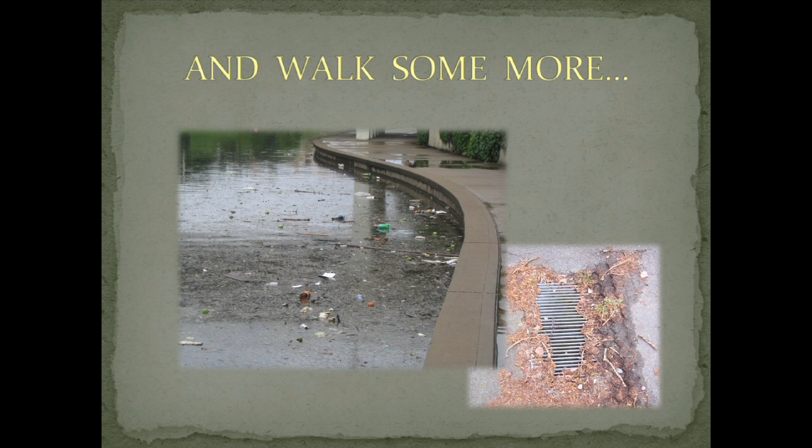So that's a very, very sad story. And then this is another thing that happens: as we're walking around, you see people throwing cigarette butts in the trash and whatnot. Stormwater comes in with the rain, washes it all in there, and then it sits there.

This is another big problem. Why? What do you see here?

It's all sediment. If it hits all at once and not over the course of years and years as wind blows and it falls off trees and shrubs and lands in water, breaks down, critters eat it—versus it all hitting at once off the city sidewalk because the rain just came and washes it—then everything that was in the creek bed and maybe even gravelly space is all suffocated, compressed and compacted.

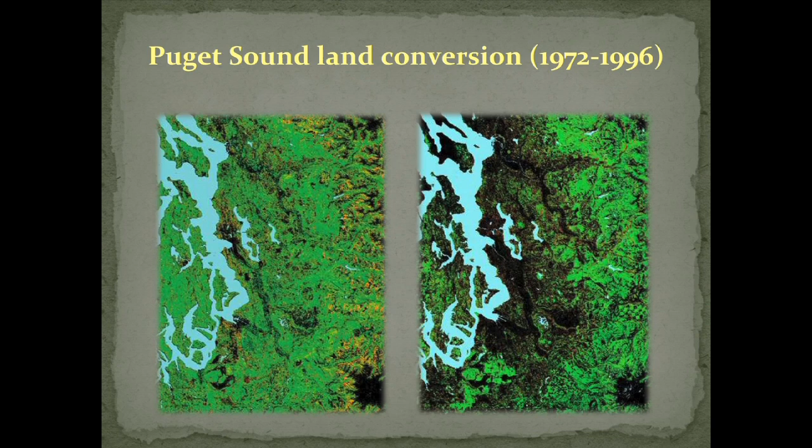This is a sad image, and to me it's sad not because of the black in the 1996 map, which is all development, but the fact that this is almost 20 years old—an 18-year-old picture, guys. What we know, because I've lived here now for 25 years, is that since '96 we didn't add canopy back. This only got worse, a lot worse.

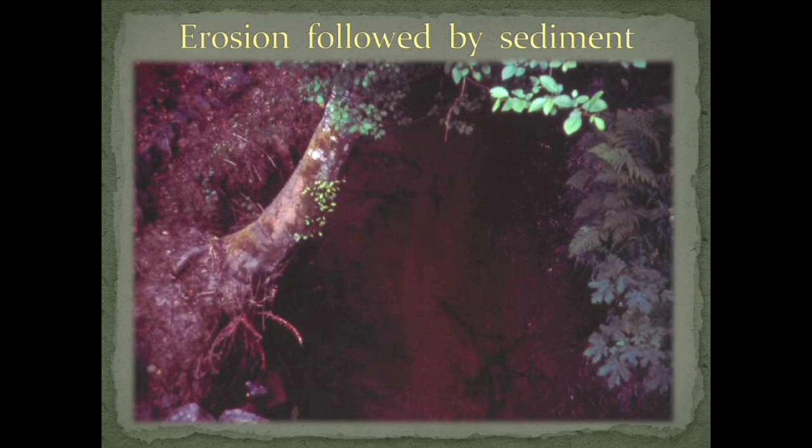We have flash floods practically in those streams, even though we're not having flash floods on the street, so we're not concerned with it. But water critters are very seriously concerned, because they are experiencing a flash flood, and it erodes the banks, undermines vegetation, and this is usually what it looks like. You've seen this a lot, I'm sure, if you pay attention to streams and creeks nearby your place. This is not the good color of a stream, this is not a good flow—you're not up in the mountains with waterfalls and rushing snowmelt. This is city.

So we now have regulations addressing all these problems, driven by a couple of things. As we talk in code, I'll go into more detail, but one big engine for us in protecting our waters is the salmon, because salmon is money. We pay attention when it's hitting us in the pocketbook. Salmon is industry—it's a huge market for people who are fishing, including the tribes, commercial fishermen, and private individuals out having a fun time. The permits, the fishing gear that gets sold, it's pretty important. So now that we don't have enough salmon to keep all those funds rolling, we're paying attention, and salmon became an endangered species.

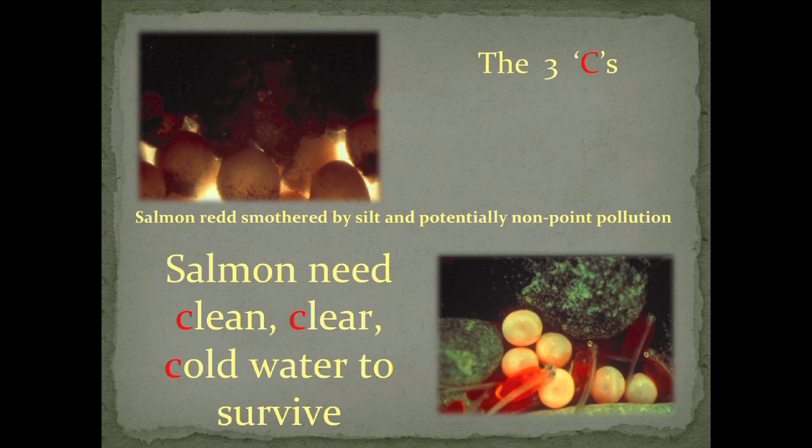A lot of them are on the verge. So now we have regulations enforced by the federal government, demanding that we get back to our 3 C's—clean, cold, and clear water—because that's what fish, especially salmon, need to stay alive and thrive. You see the eggs here covered with sediment—they will never hatch. This is what they need to look like.

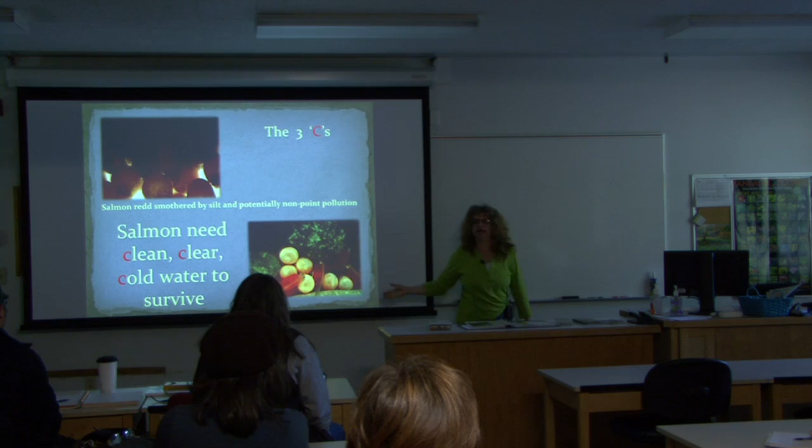How many of you would like to have this in your basement? Not many. So it's a totally legal event to overflow it into the nearest natural waterway. It has to go somewhere. We are on an overload.

Because of the salmon challenge, we now have limited volumes that each sewer system has a permit for—how many gallons a year they can overflow, and how many times that can happen. If they exceed that, there's a financial penalty they have to pay, which comes out of your sewer bill. This penalty drives improvement, to find other solutions for managing runoff. If they invest that money into a solid management system instead of paying penalties, they can reduce the volume and number of overflow events.

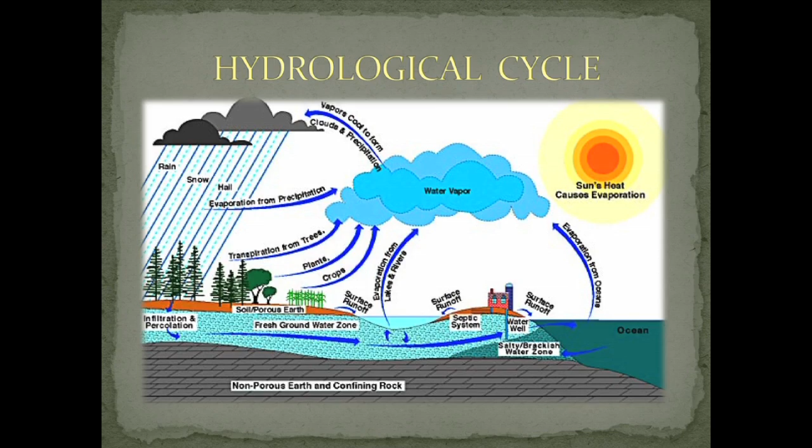I want to talk about this in more detail. We've already gone through the fact that we have a natural water cycle, but it has a lot of other implications. The water cycle is very intimately connected to chemistry cycles, including the nitrogen cycle. It's also very important in terms of atmosphere and climate. So it's not just that we're reducing negative impact or positively impacting salmon—we're able to alter our own climate with how we manage our cities. This is why stormwater management is becoming so important.

If you have uninterrupted native vegetation—in our case, coniferous forests, deep forests with lots of layers, but in the Midwest it used to be prairies, lots of beautiful wild areas that didn't have a lot of trees necessarily—it still functioned fully the same way. You have canopies that could be several hundred feet before we cut those trees, and now we're wondering, 'oh, it's an 80-foot tall tree'—it's a baby tree. We used to have those big tall canopies.

Have you ever stood under a big Douglas fir in a rainstorm? How wet do you get? Barely anything, because the canopy captures most of that water.

And then the water, as it's dripping down and rolling down on that tree, it comes in little bits, meaning that whatever is below it is not going to get soaked. It doesn't experience that same rain that the higher canopy had seen. Then we have our tall understory canopy, the medium understory canopies like vine maples and such, and our shrub layers, and then our taller perennial layers, such as ferns and other things. And then we have the ground covers and ultimately the duff layer on the ground.

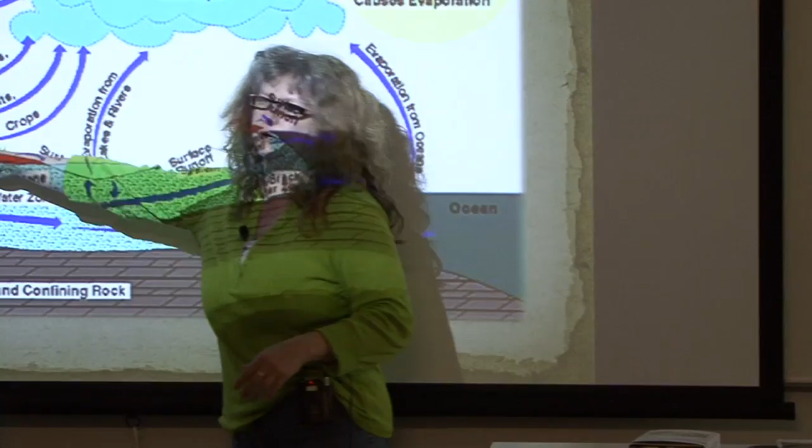Now, with these changes that we created, we don't have the steady evapotranspiration happening. And we are experiencing here in the Northwest too unusually sunny and dry periods that we didn't have before, because we don't have a cloud cover anymore that we used to have.

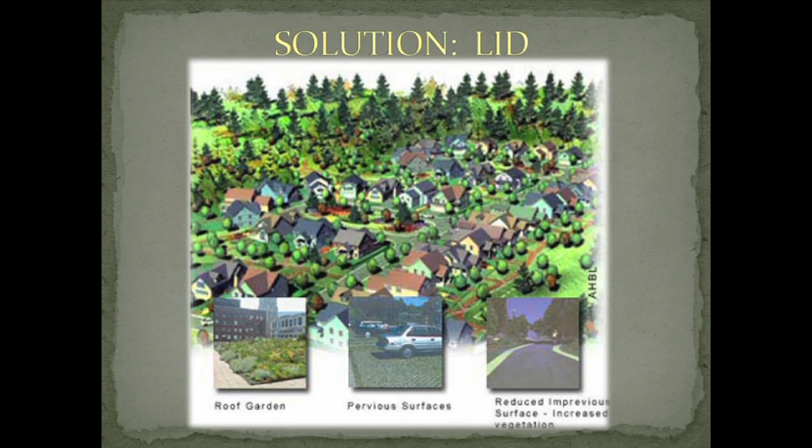This is very disturbing. So this is how LID, low impact development, came about. And the idea behind it was to reduce the damage. Because still, when you're talking to people, you will hear, it's not fair to ask that we change our life back in one day to sustainable. We can't just expect people to throw away their chemicals and throw away their bad practices and do something different tomorrow. Well, we may not be able to ask that, but our planet is actually asking for it.

If we are not doing it, we're going to be tossed overnight into very interesting places. So low impact development was the gradual pattern. Now we finally arrived to the positive impact, and it has to happen very soon. And there is money actually behind it from forward-thinking governments. So low impact development looks at this, what we created, and tries to make it function in terms of water.

Like this. Because you cannot build the forest back. Let's be honest, this takes thousands of years. It didn't just happen overnight, and it does need time, and we destroyed it overnight. Because we can't ask people to change overnight, but we sure can do that to nature.

So hydrologically, we're asking our built environment to function like a forest in the Northwest, or like the prairie in the Midwest, or wherever you are, you're trying to mimic your natural environment. That's what low impact development does.

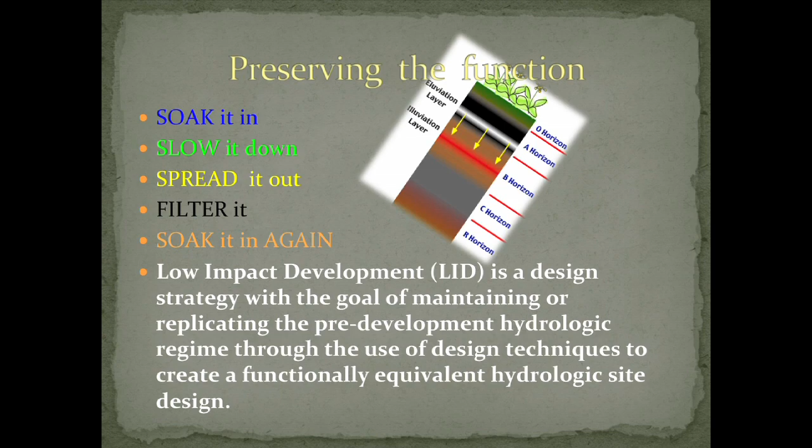It wants to slow that water down. So instead of hitting within minutes after the rain is starting and causing a flash flood in the stream bed, slow it down and make it so that January rain doesn't show up in our streams until June, because it's moving through soil instead of a pipe. Spread it out over a vast area, because the canopy of a Douglas fir, when you add all the surfaces of the branches and the little needles and everything else, it's tremendous. It covers a large area, so spread it out as much as we can.

And filter that water, because this is what our forests and our soils did. First of all, we didn't have all this industrial stuff coming down in the rain, but then they were able to take anything that did come from volcanic activity or whatnot and filter that. So they can actually help filtering the water. Soil does an incredible work at filtering water.

And then you want to soak this water, whatever is still remaining, into the ground again. Put minimal into pipe, if any, at all.

And then I want to talk about this here, because today we will be talking mostly about green roofs and vertical plantings and low impact development related to that, and food growing related to that. Sustainability is a very big subject.

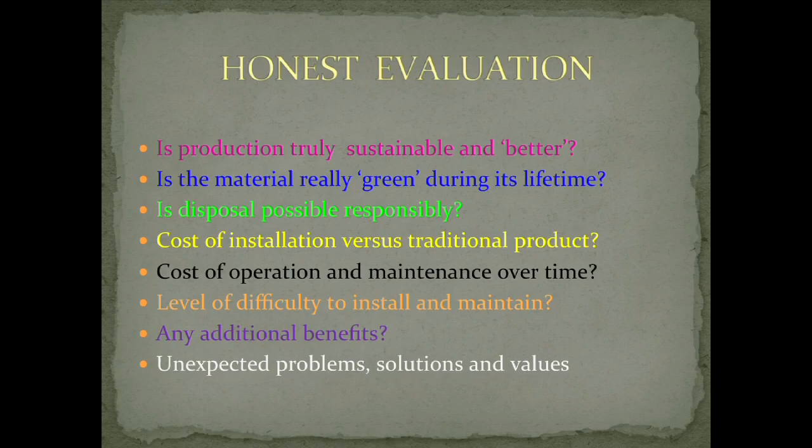And when you're looking at how sustainable something really is, you got to evaluate what you are looking at. This is a set of questions that was developed 8 or 10 years ago by the Sustainable Development Task Force of Snohomish County, which we had running for some years. One of our projects was to actually create a standard on how we can look at new solutions that were brought to us, how we can decide whether or not they really qualified as a sustainable solution. And when we talk about green roofs and green walls, these questions will become very important.

So, production of whatever you're using, is that really a better system? And when you're looking at it, you have to look at all the different aspects of carbon footprint, transportation, water, air quality.

Jobs, wages, conditions for those people. If they work 24/7 like I do, is that out of choice like for me? Or is it because they have no other way to pay for the food? Is it slavery? What is it?

And then, is that material really green in its lifetime? And how do we define green, by the way? That's why the blue economy came about. How do we define green? We were so focused on just materials, people got sort of forgotten about.

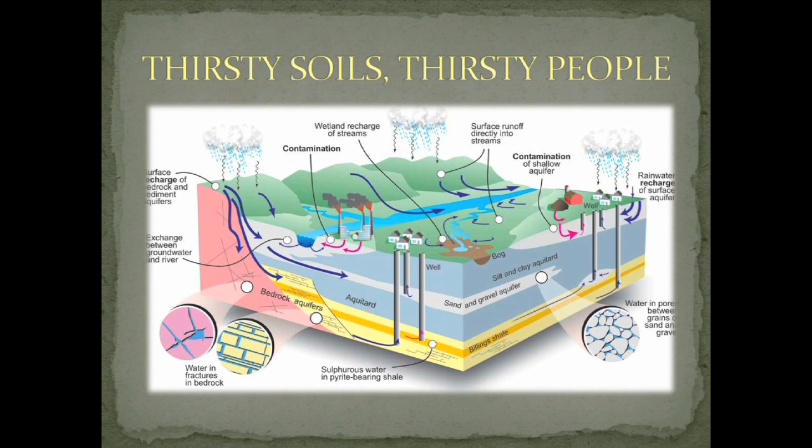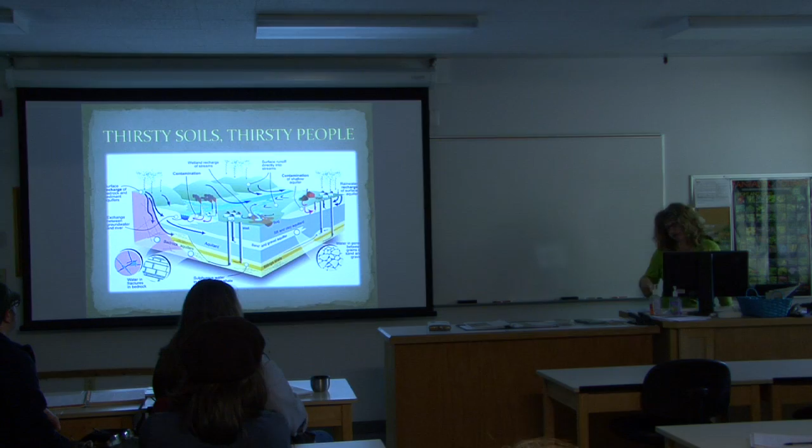Here's another image that, as you look through the slideshow, I want you to really think about, because it shows the soil layers a little better. Aquifers and what happens, and how water actually can sit between the gravel and sand particles. These are much better aquifers than clay. So the aquifer for us is either sometimes below hard clay pan, or right on top of it where we have gravelly pockets and sandy pockets.

Underneath Everett, actually about 60 to 65 feet deep, you have beach sand from previous geological times. It's beautiful sand. So once again, this is what we're mimicking.

And then cost-wise, we now have proof, with Seattle leading the charge in the nation, that over a 50-year maintenance and installation period, these systems—green and low-impact development technologies—are more cost-effective than traditional development. It's important to keep in mind that overall the cost is less.

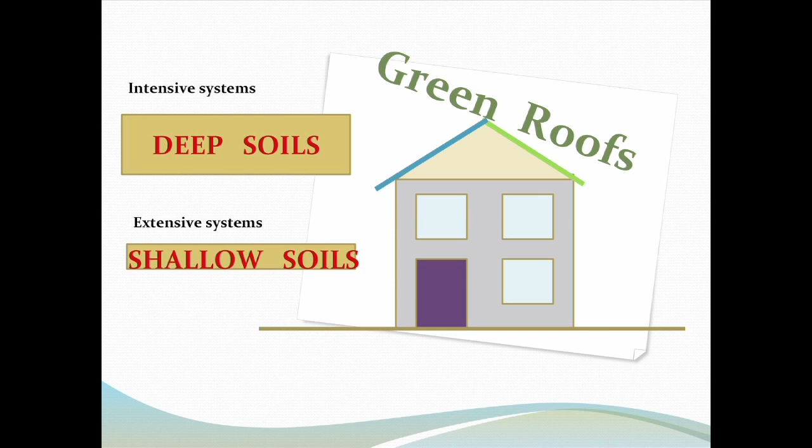So, green roofs. It's one of those things we hear about a lot. I love green roofs when they are done responsibly. And I really believe that a lot of the green roof systems we have are done incredibly irresponsibly, and we'd be better off if we just kept our roof. But I'll talk about that in more detail as we go on.

It's a low-impact development technology. In some parts of our country and the world now, it's a required technology—if you're building a new building or remodeling, you have to use green roofs if you're within a certain city limit. It has very good goals and reasons behind it. Green roofs and green walls are the fields that got the biggest greenwash. Greenwash means when something is sold as green and sustainable, yet in reality does very little toward that.

We have two kinds of green roof systems: intensive and extensive. Intensive has deep soils—usually if you reach 8 to 10 inches, you're in a gray area some call intensive and others call extensive. Beyond 10 inches, once you're in a foot or deeper of soil, you're in an intensive roof. If you're below 8 inches, it's an extensive roof. Sometimes roofs can have only 2 inches of soil on them, believe it or not—that's the very end of the extensive spectrum.

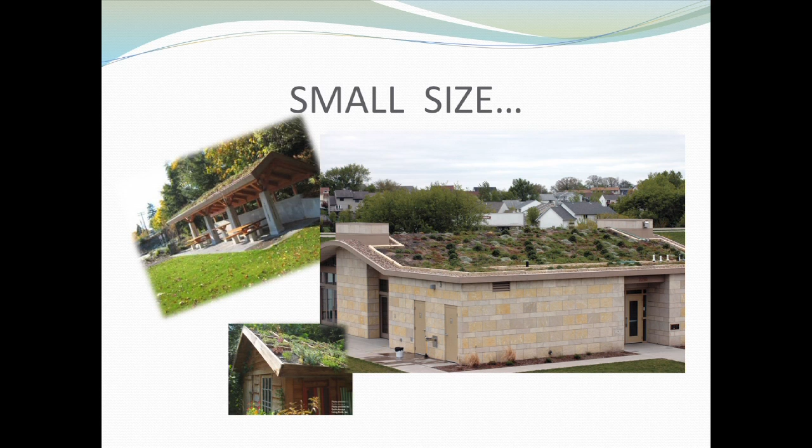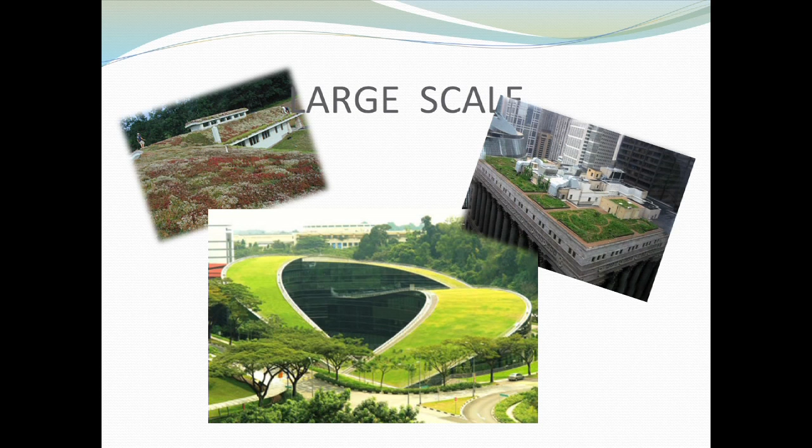Singapore had experienced a tremendous amount of pollution. Because of the ocean currents, they ended up with a lot of trash at their coastline. If you look at pictures from about a decade ago, people were sometimes able to walk on trash in the water. But they did spend money because they make a lot of money. Singapore is actually a very rich country because that's where a lot of business happens.

They're investing it into recreating what's happening in the cities. So this is their roof system. In Chicago, we now have regulations that ask that remodeling and new construction use these green roof and green wall and low impact development technologies, unless there are limitations they cannot overcome.

What's common in all of these is, what do you feel when you look at these images? How do you feel? Is it a positive experience? If you were neighbors and working in your office and this is what you'd be looking at, would you like that view? Yeah, so this actually has a positive impact on the community.

Another thing it does is help with the heat island effect. In cities with all those pavements and roofs, in places like Singapore and Chicago, when the sun comes out it gets really hot. We don't necessarily have that problem here in Seattle, but in other parts of the world where sun is more common, the city can get very hot. That's the heat island effect, because around the city otherwise the temperature is very different. With all these reflective surfaces it gets too hot to be in. These roofs mitigate that, and they add to air quality because they are vegetation. So they have some really important benefits. They also help with heating and cooling costs within the building because it's another insulation layer.

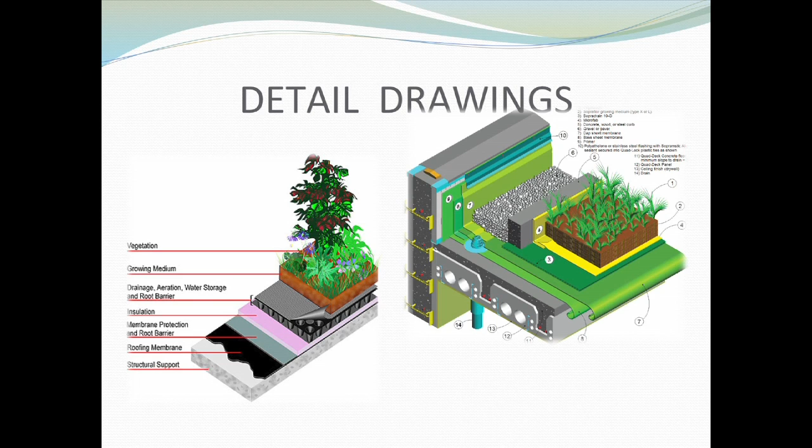Here are your layers. This is actually a pretty standard image, and then I have some other things here to show you when we're talking layers. Lots of layers, and what those layers are made of and how they are placed makes a world of difference in terms of sustainability.

These are no longer bark layers. They no longer decompose, and they will not go back to nature when you leave it in a pile next to the building. This stuff lasts forever, especially with our new building standards that we're pushing for, so that our buildings will be designed for at least 100 years, because it's a joke that our 20-year-old houses are falling apart. So we're now designing to at least 100 years, and that means that in terms of green roofs, these things will have to last for a long, long time.

We have experimenters out there trying to come up with material that will have a lifetime, so 100 years after its installation, it will start to disintegrate and go away. But it's very difficult to come up with those things and make sure that it's good for the environment as it breaks down.

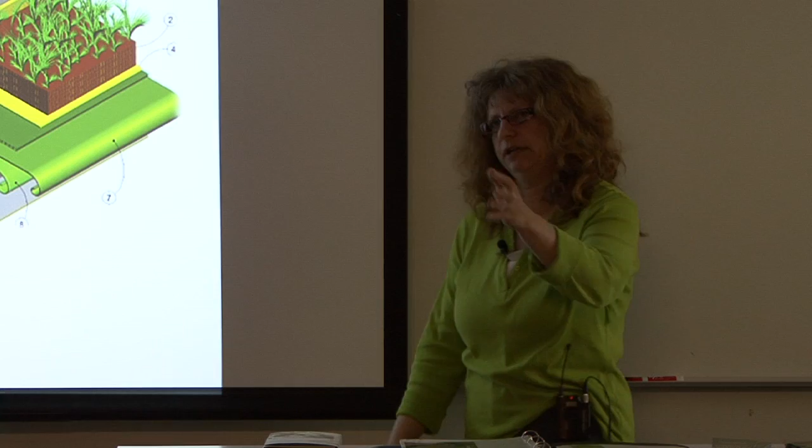There are some new non-leaching materials out. They're non-leaching in their roof lifetime, supposedly, although that's another thing to understand - these roof systems, we've had them around for 15 years maybe. So do we really have a lot of data? Can we really say that, oh sure it's fine, no problem, doesn't hurt you? We can't really tell for sure yet.

So we have roof membrane, and then we have that membrane protection layer called root barrier, because you have vegetation growing there, and what do roots do? They penetrate things. How many of you have seen that there's a little hole on the pot, or it grows right into the clay pot, depending on what plant you have. So you need to protect your roof from that - you don't want the douglas fir root to come into the living room.

And then you have insulation. Let's talk insulation - that's something I hate with a vengeance. Have you ever seen those pink foams, the foam boards? Do they ever break down? No, they just break into smaller and smaller and smaller particles, but they are permanent, and they are horrible. We have wildlife that's dying out there every single day, and it's a real thing.

It's not that 5 birds dropped dead today, it's large numbers and all kinds of critters, including bacteria, by the way, in the soil and water. We have critters dying from eating things they shouldn't be eating, but their body eats it anyway - they swallow it, their stomach fills up. A lot of times they're full but get no nutrition, or it clogs their system, or punctures their organs, or poisons them from the inside out.

I'm very much against foam. I'm just telling you that if I see a system that uses foam, I'm not using it, sorry. It's out. And that will tell you why I'm using very limited systems, if at all.

So drainage and aeration and water storage and another layer of root barrier. That's sometimes all in one, sometimes these are different layers. The reason behind it is that plants will grow into that foam no problem and break it up, so you want to protect the insulation layer. You want to have at least 2 root barriers. It's good practice, especially if you have raccoons around, because those guys will dig.

So having double root protection from roots is helping. Then drainage, because this is a stormwater solution first and foremost, you're not building a pond on the roof. You need to make sure that the water, when it's in excess, can drain away, and it drains away predictably. It doesn't show up somewhere where you don't want it, but you can actually tell where it's going. Predictability is what drives design. Even if you are growing food, you have to have a plan, and you want to know that you're following it to a degree. And if you end up somewhere else from where you originally were going, you can alter course and change your patterns.

And the water storage layer - this is where rainwater actually gets stored in the roof. It's an additional void space, because the goal is to capture as much rain as possible, slowing it on the roof before it hits the storm system. So you have to have an area to store it in - this is your layer for that. Then you have another layer on top of it to sort of hold up your soil if this is needed, not always. And now you have your growing medium.

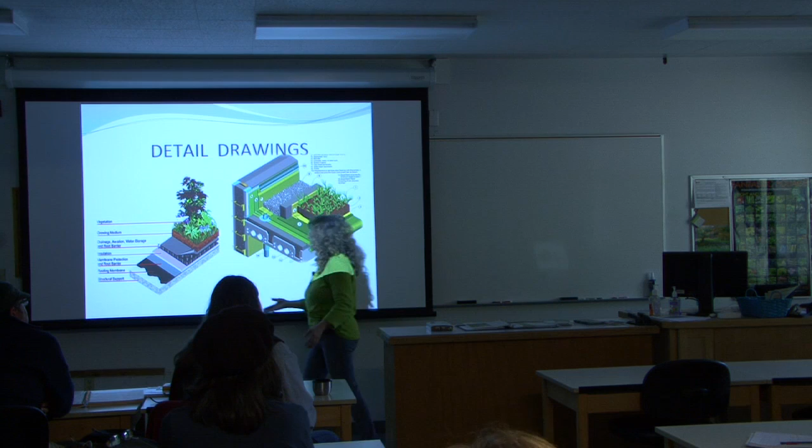And then you have your plant material. So these are the layers of a typical green roof installation. Then it's designed with stormwater management in mind. These are a little bit more sustainable depending on what these layers are made of. And one big thing is that we solved a lot of the layer problems with metal.

If that metal actually comes from recycled metal, it makes a lot of sense. But if we had to fight a war and kill off entire villages to get to that very special lightweight metal, then it wasn't a good idea after all. And the energy, where does that come from? Is it alternative energy that we're producing, or are we using fracking technology? All of this has to count - every single thing has to count anymore.

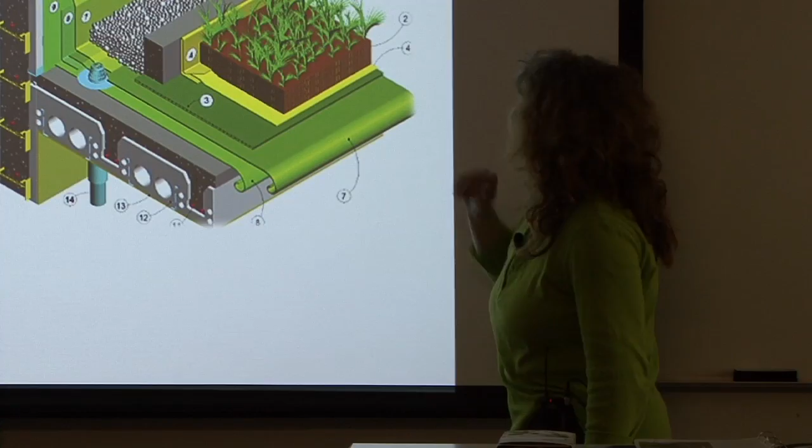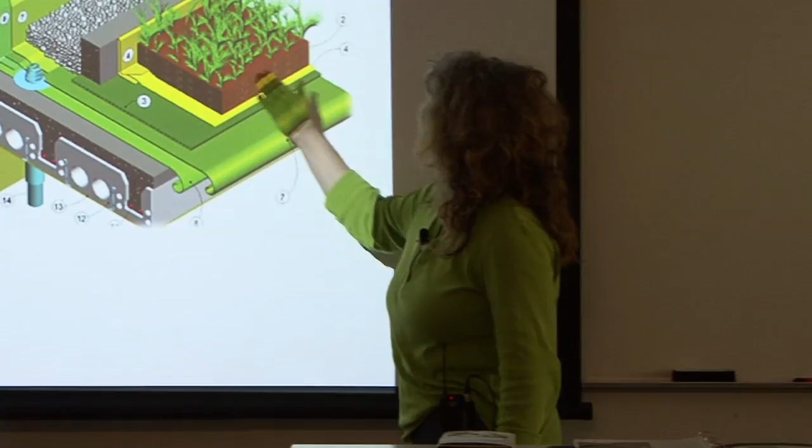And then you have all of these layers, and what are those made of? Recycled material, maybe there is a big push for that. Is it also recyclable again? And how you build it up to the very end, what your soil is - if it's actually an intensive roof layer, you may just get somewhere where it's more sustainable.

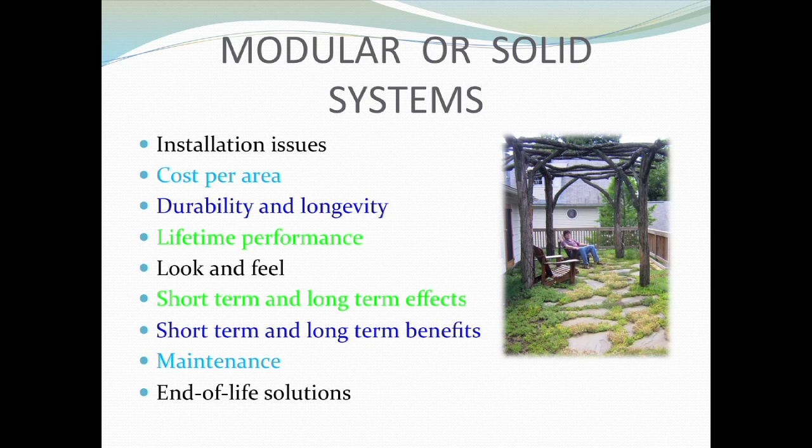And then we're looking at the modular and solid roof systems. This is a solid roof system with some pavers and a seating area on top. Or you saw those modular systems with the little boxes, these little planter trays.

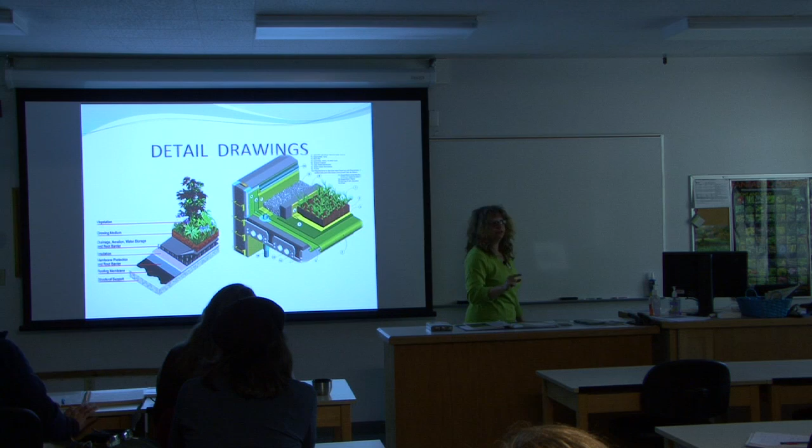If those are actually made from recycled material, let's get back to this slide really quick, then just the tray itself can solve a lot of these layer problems. With that tray and metal, you can actually get to a very reasonably sustainable green roof system.

Because then you don't need that foam, you don't need those evil things. And I'm not calling them evil to be funny, I think they really are.

So, installation issues, modular or solid. A modular system, installing it, not very big trays. Let's get the smallest trays, 2 feet by 2 feet, and it's only 3 or 4 inches deep. Soil and plants are in it, ready-made. You take it up on the roof and plop it down. Isn't that an easy thing to do?

Except that these little beasts weigh 78 to 90 pounds, depending on whether it's wet or not. How easy is that to maneuver? Oh, very nice. After 3 or 4, you're probably going to be in the chiropractor's office for the rest of the year.

If you're actually building a solid system where there are no dividers, you can put your soil down and then put your plant in. It may be an easier exercise on the back. And that's something to think about also.

Cost per area really varies, and it can be very expensive. Usually, 1 square foot nowadays is anywhere from $32 to $150, depending on how intensive or extensive, modular or solid system you're using. Very expensive compared to a traditional roof.

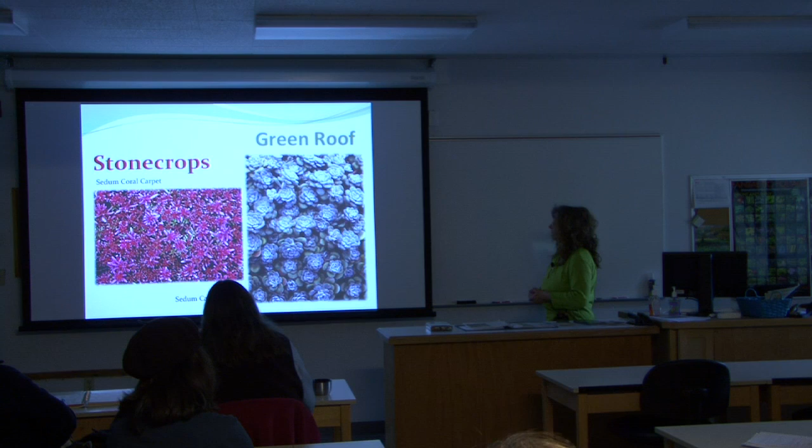Extensive roof. And then these are some of the plants. I'm not going to go through this plant material in much detail because this is not the edible stuff.

But I want to go back to the food growing relating to our green roof system. When you are growing food in a roof space, it's not a stable, steady, predictable arrangement. Because with food growing, unless it's a food forest type growing, or where you have just simply shrubs that you harvest berries or leaves off of, when you're really growing intensively the edibles, you move things around constantly.

They have very special soil requirements. They have very special water requirements. And they constantly harvest it out and start over. So you cannot produce a canopy that's predictable and steady, staying in place, undisturbed and unchanged. You cannot predict the root system, and it's constantly in the way of changing.

So you can actually grow food, even annuals, on a roof. And it's a good idea because in the city we have very limited spaces, so use it.